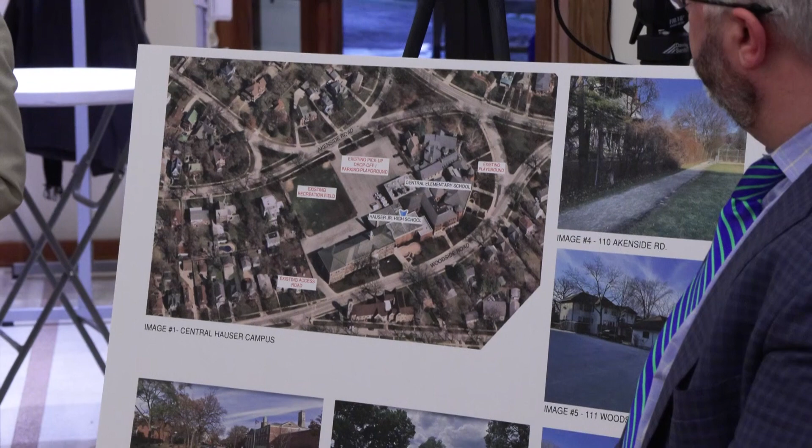We'll talk about the existing conditions here for a minute, and maybe Jason could point those out on the site plan. Currently, to the east side of both Central and Hauser, there's an asphalt parking area. That is where staff parking happens, at the most eastern side of it. In between that and the school is where essentially the playground is.

So all hardscape play happens there. Just to the north of that, you'll see a sort of grass area. It is not usable a lot of the year. It's got some drainage issues, needs some redevelopment. So that's been a conversation that the district has been having ongoing about what is the best approach to make that more usable. As we talk about pickup and drop off, it happens to the east, really in one lane.

You see the two curb cuts along Akenside. So you have essentially one lane of traffic that comes in and drops off kids and then exits to the south there. So that happens at the rear. The majority of pickup and drop off happens on the western side along Woodside.

So Woodside becomes a one-way street during school hours. There's no parking on the right side of the street from 8 to 8:30, and then again from 2:30 to 3:30. So that is in order to allow pickup and drop off to happen along that eastern side of Woodside.

What often happens is that stacking happens on each side of the road, and so drop off happens on the western side of the road, and so we end up having this pedestrian crossing across the street. So that's something we'll talk about a little bit later, but it is an existing condition that we've been studying.

As we talk about the recreation fields, I've already mentioned the grass field. Central has an existing playground at the front of the school. It's about 2,000 square feet. It's very undersized for the size school that it is.

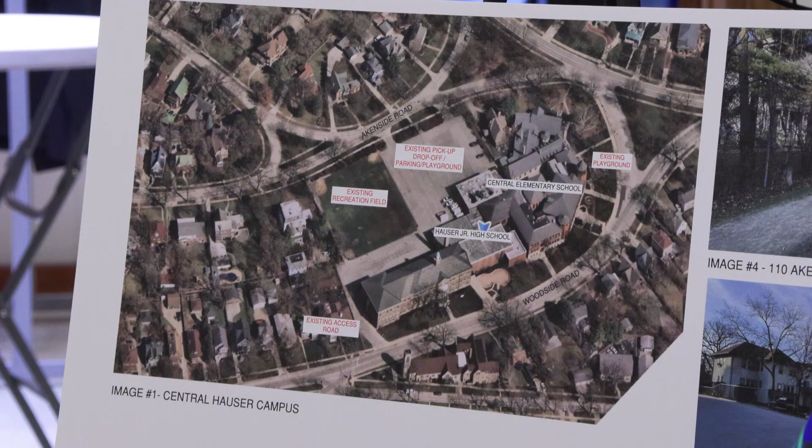As we move forward, our proposed plan looks to, again, separate that parking and play.

So what we're looking at here is the existing parking spaces at Central and Hauser are 77 spaces. We'd look to increase that to 86 spaces, including 4 ADA spots. We feel that right now that works well for the school, and it gives a little bit more parking. Required by code parking is 114 spaces.

So we are challenged with trying to provide all of these things, more recreation space, safer pedestrian routes, as well as meeting the code for parking. So I'll talk about that in a minute.

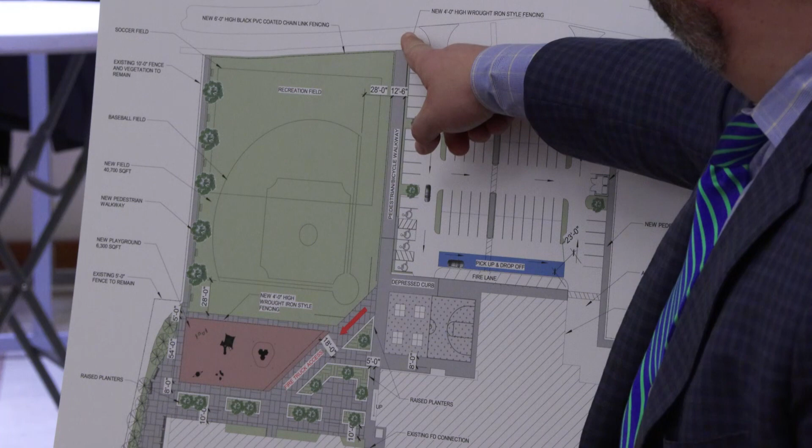We've identified 3 pedestrian and bicycle routes that come in from the east side of the site. The largest and widest one at Central is really what we're calling the pedestrian bicycle thoroughfare. So all the kids would come in there. There's a large population of kids that bicycle to school, so that's something that we wanted to accommodate for.

Oftentimes, many of you may have seen kids walking through parked cars or through traffic, and it's just not a safe condition. So we're looking to make that better and separate those 2 modes of transport.

As you'll see toward the left, we have a recreation field. We would propose to redevelop that. The district's still in conversations about what is the best way to do that in terms of approach and usability and cost. So that's something we'll be talking about later.

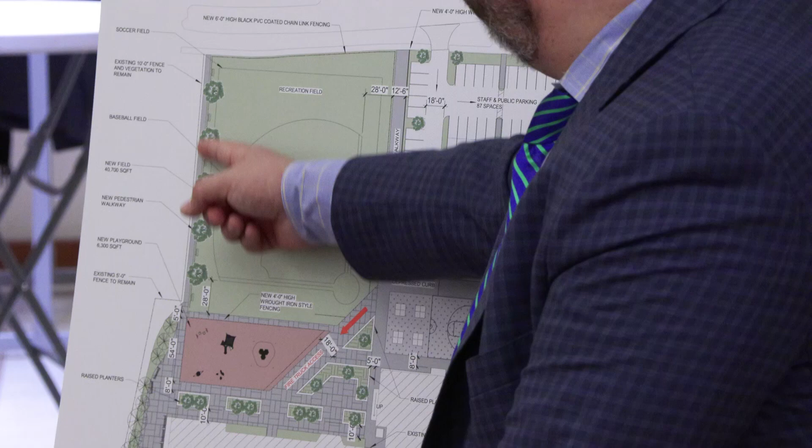And then just to the west of that, we have a new developed playground that would be primarily for Central, but would serve both.

Through a lot of conversations with the village, with the fire department, and then also with the village arborist, we've identified some key constraints for the site, primarily looking at the playground at the front of Central. It's got some large oak trees, 2 oaks and a maple that we do not want to destroy, and really to enlarge that footprint is not a doable thing.

So we moved that playground to the back of the school, and so that gives more space and obviously saves the trees. So what happens with the playground at the front of the school is still in conversation, but it looks like widening that or enlarging that is not going to be feasible.

As we talk about... I'm sorry, I lost my train of thought.

As we talk about the playground at the rear, that would be an engineered wood fiber playground, so it does offer some permeability. Jason will talk about those percentages here in a minute. But we will be looking at not only infiltration underneath the recreation field, but also the playground and then permeable pavers as is indicated on the plan.

There are a few things we wanted to bring about as we got into looking at this. So as we look at a few variations that we're going to need to be requesting, one is parking lot landscaping.

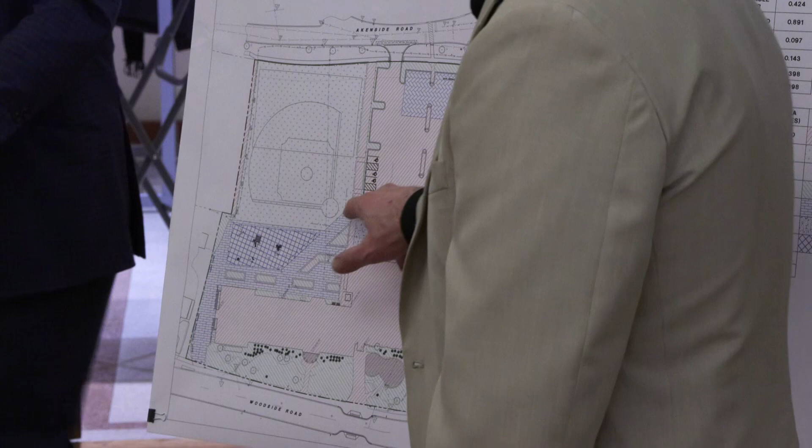Those pavers are in two locations: one in the parking lot, and the other in the walkways around the playground, including the access drive for fire access over to Woodside.

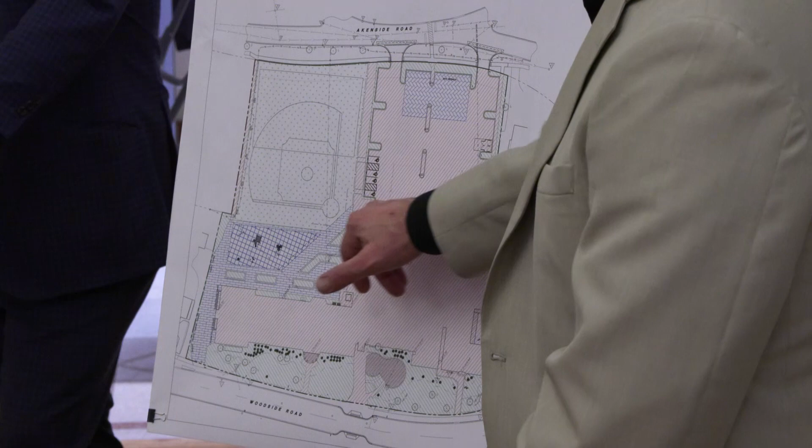The acreages are: wood chips, 0.14 acres; permeable pavers, including the walks and parking lot, 0.42 acres total; and the concrete basketball area, 0.1 acre. So the total is 0.66 acres. Considering the disturbed area for the project is 3 acres, we think 0.66 is a fair amount for that level of development.

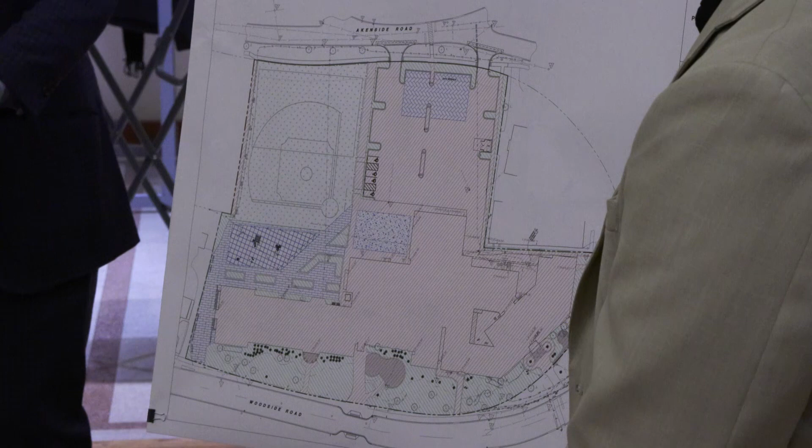One more thing I want to point out is that we propose a safety measure on Woodside—a curb extension, which involves bringing the curbs of the street in towards the middle of the road at the crosswalk. This was highly recommended by the traffic engineer.

The intent is that it shortens the distance pedestrians are in the roadway. It also minimizes the number of cars parked right where pedestrians are darting out between cars, since cars can't park in those areas. This frees up space so the pedestrian can be seen from a longer distance.

That's me. You want to go back? Yeah.

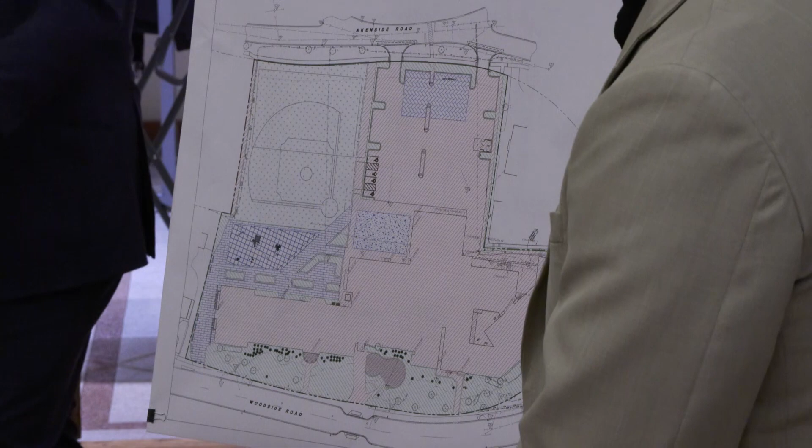I did want to mention, thank you—that crosswalk extension, we looked at that. As Jason already said, it does shorten the distance the pedestrian has to cross to get across Woodside, which I think is about a 37-foot wide street.

We're proposing a reduced flared curb extension of 7 feet, so it still leaves a usable two-way street while making pedestrians more visible as vehicles approach. That's a measure we feel is important at the entrance of Hauser. There is a crosswalk at the entrance of Central, so this would mimic that, but without the stoplight.

No stoplight is proposed. The other thing I wanted to mention was the fire access that Jason touched on. We met with Chief Buckley and discussed our proposed access around the site, including closing off the access drive north of Hauser, which is often used as a cut-through. When Woodside is one-way, it's hard to tell when it is or isn't, so left turns aren't allowed there during school hours.

Oftentimes that happens, so it's pretty hazardous. We're proposing to close that down, make that a pedestrian thoroughfare, but still provide access for fire trucks when necessary. Chief Buckley was good with our approaches, both at the access drive and the backside of Hauser. Access to Central is pretty straightforward with the alleyway back there. The primary fire connection is at the front side on Woodside of both schools, so that would be their primary location to set up.

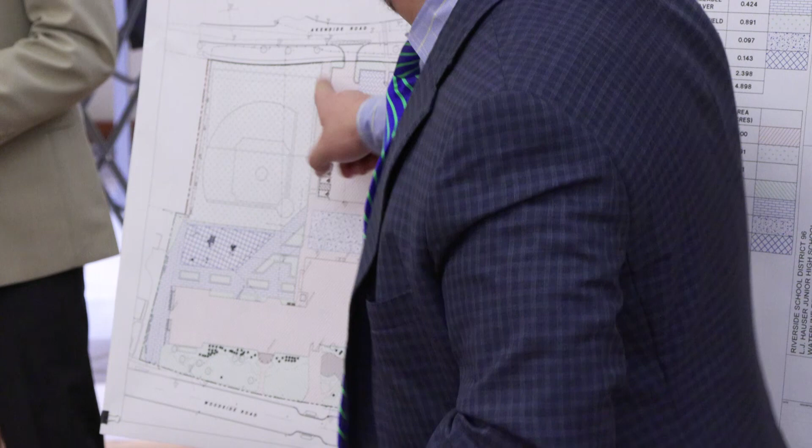Commissioner Miller: Just picking up on the fence issue, so there'd be a 6-foot fence around the entire field. Can you point out where the other 4-foot fences would be? Around the wood chip playground, right? And then also along the pedestrian walkway, separating the vehicular traffic from that pedestrian walkway. And that walkway is 12 feet wide? Yes. Okay, any other fences?

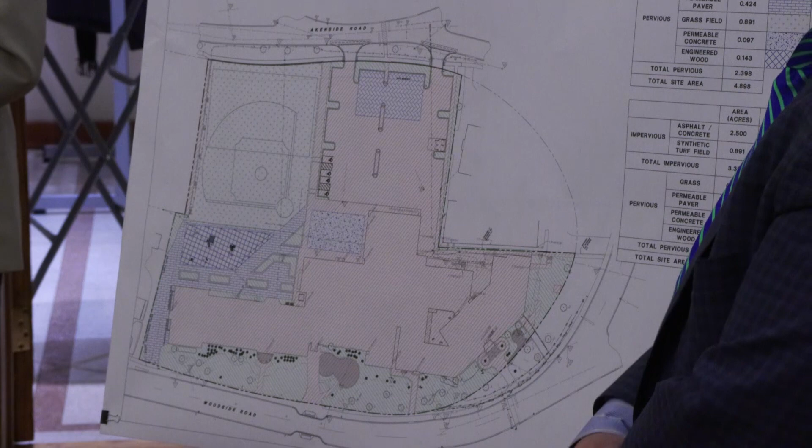There's the backstop at the baseball field, which is 20 feet tall. And that's it, the other fences are existing, to remain. So can you explain the rationale for having the 4-foot fences along the parking lot?

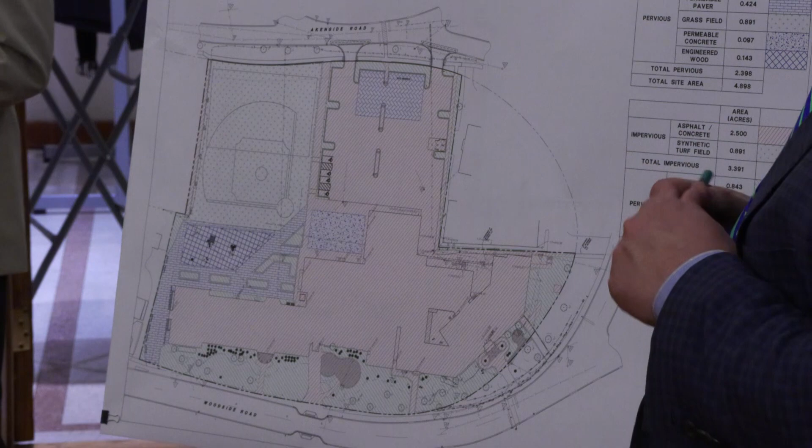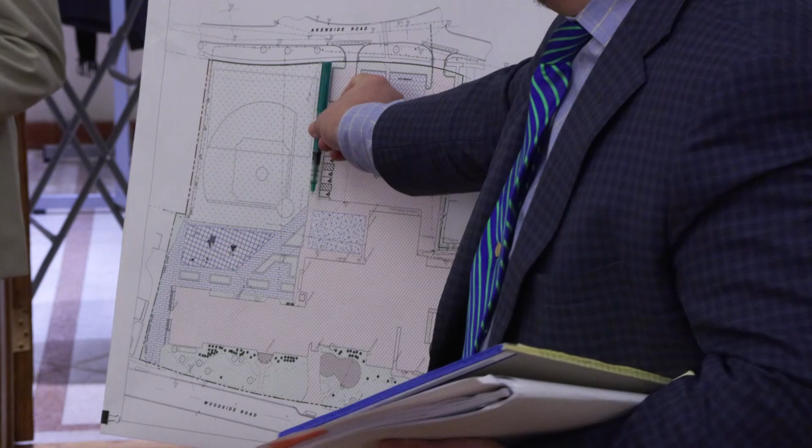Well, I'll assume there'll be bumper curbs there like any other parking lot. The 4-foot fence around the playground area is pretty standard practice, it's a safety measure. We've got elementary school kids, as young as preschool and first grade, so that's a standard supervision rule that we like to use, and the district used at other playgrounds. Along the walkway, it's important to separate that vehicular traffic from the pedestrian traffic. We're trying to define spaces, but they always seem to overlap when they're right next to each other, so to avoid any accidents, it's a good safety measure.

What we would provide—but now for the central walkway that goes right through the parking lot, you're not proposing fences to fence in people there? No, if I understand where you're going. But you're assuming that students are going to use that as well, I assume? They'll be allowed to use that? We're calling this the central—yeah, the one that goes through the middle of the parking lot.

No, we're not proposing that to be fenced. The intent there is that would be staff, adults. We're providing a sidewalk, but maybe folks that are paying a little bit better attention than kids going to school. So from a parent and someone who's lived not far from that school for like 15 years, I suggest that kids would use that walkway that goes right through the parking lot.

If for no other reason, there's a crosswalk right across Akenside. So kids coming from that section of the village, walking or pushing their bikes, aren't going to cross that crosswalk, then take a right and go to the 12-foot wide walkway. I'm just saying—I agree with you, and it happens today.

So what we tried to do is flank either side, north and south, and provide one central. What the district does now, and I think they'd continue to need to do, is have someone staffed out there to direct kids that they can't walk through the parking lot. I'm just suggesting that's not sure going to happen.

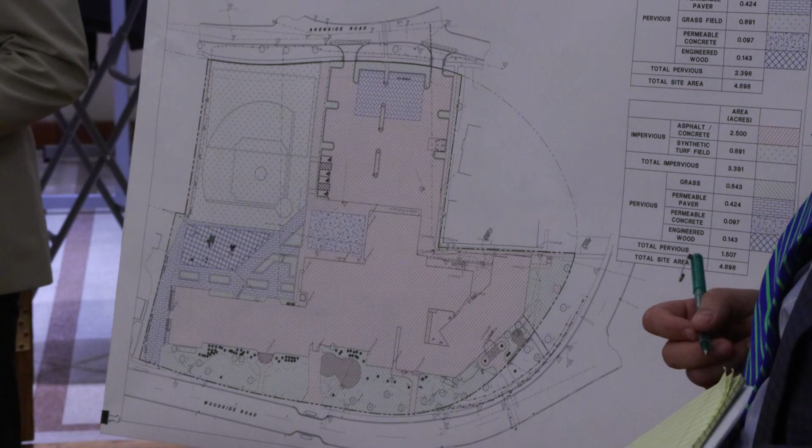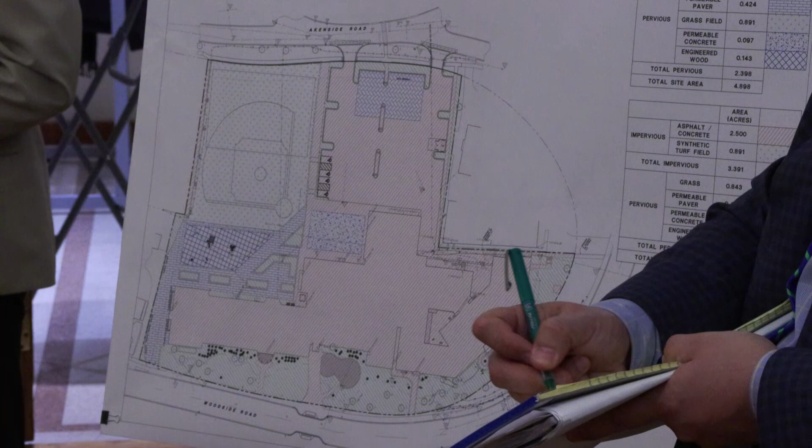I don't know if there's anyone from the D96 board other than Mr. Marhoul who will hear this, but as a parent of D96, the perception, I think, of the students is that there is very little fun at recess, and there's way too much supervision. I think this will make the play space far more controlled rather than enhance it—if the idea is that you bring a class and their recess will be in the fenced-in playground area. Since we have a role of approving this fence in this street yard, I think there are reasons beyond zoning for not having that fence. That's all I'll say about that.

Ryan, could I ask—were you planning to put a fence in the existing playground as well? No, we were not proposing that.

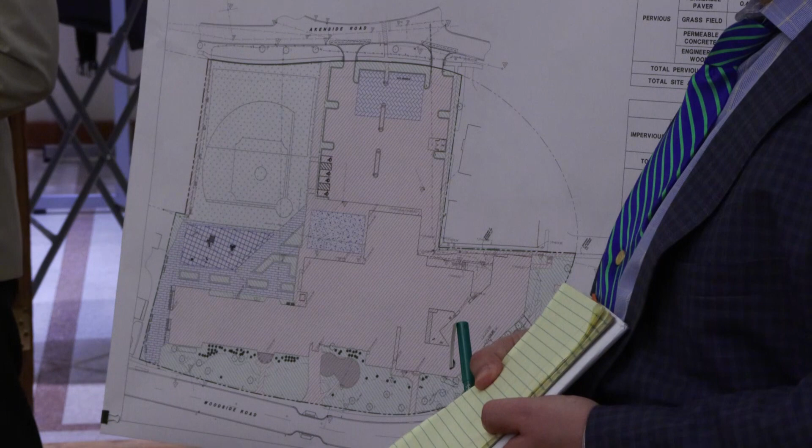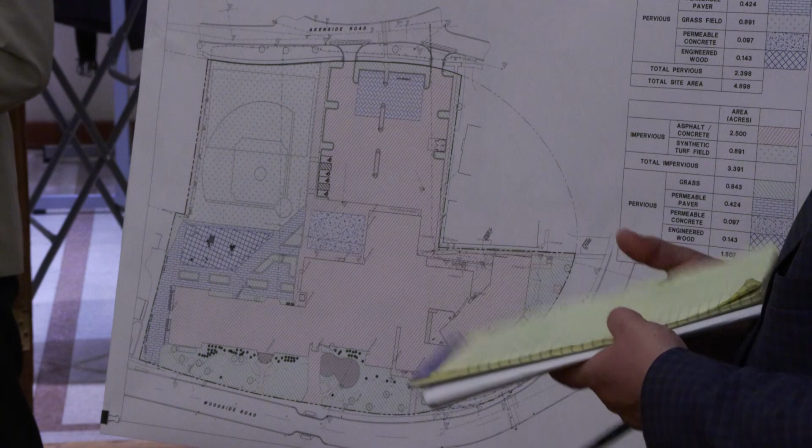Although, to Commissioner Miller's point, once the teachers are parked, parents or caretakers will be coming into the school from Akenside to drop off their children, right? Yeah, that's something I didn't highlight enough, but it is considered pickup and drop-off, primarily for Central Elementary, to alleviate the congestion that happens on Woodside. The intent is that staff would park early, and it could be used for pickup and drop-off. There's enough space to bring cars off Akenside for queuing, so those cars don't back up onto Akenside, which currently happens sometimes now.

Other questions, comments? I just have a point of clarification. I'm looking at what was provided to us online, and it appears that the playground and the basketball court are flip-flopped. Was that changed, or am I just reading your map wrong? The playground is still near Central, and the Foursquare and basketball court is still on the north side—can you point out the playground for me?

Okay, that's the new one—maybe I'm looking at the old one. We've looked at several iterations of this, and through conversations with the village and the arborist, that playground has moved quite a bit, so I apologize if that's not the most current. As I mentioned, there were reasons why it didn't work at the front of the school, so this is the most recent design. It was here at one time—okay, now it's there. All right.

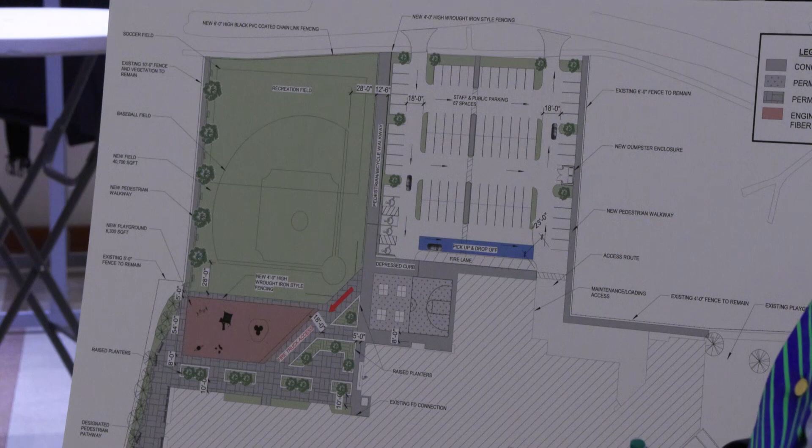With regard to the fencing, is there a fence along Akenside, right along the sidewalk? No, there's not. So the fields are not completely enclosed by fence? There's a large hedge, but that is not existing. We do have a fence proposed, though, behind the sidewalk on the side of the field.

And that was the 6-foot chain link? Mhm. And it's like a foot behind the sidewalk, is it? Roughly, close.

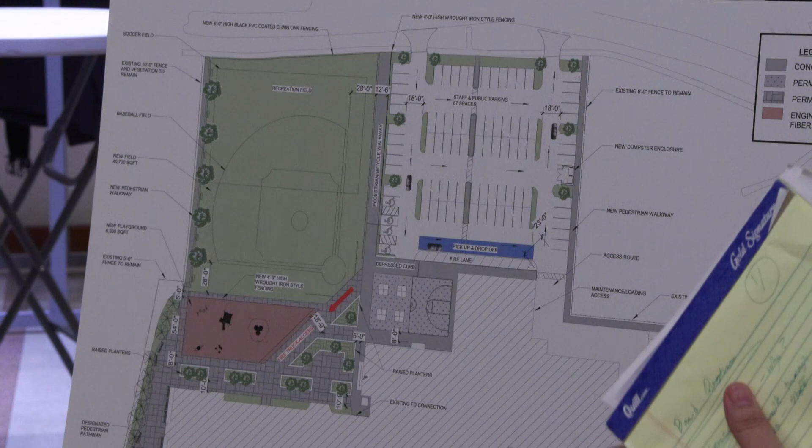Okay, and you're moving the sidewalk though, right? It looked like you were proposing a new sidewalk that moves it a little bit further away from the street. Not really, no. Maybe we had something in there that made it look that way. But really, the only sidewalk we're proposing to change along Akenside would be right where the driveways are, just the sidewalks adjacent to it.

Okay, I definitely would not be in favor of a 6-foot fence along the sidewalk there, certainly not chain link fence. Maybe something ornamental, like a metal ornamental fence and something shorter. But even that, we try to create a vista down the street and keep it off of the sidewalk. To be that close to the sidewalk is a little enclosing.

One thing I'd like to see with the next submission: I know we've already asked for existing impervious and proposed impervious and what the difference is. But with all of the permeable pavements and surfaces we're starting to see come in as a replacement for landscape, I'd like to see a comparison between existing green space versus proposed green space. By green space, I mean planted area, not wood chips, and definitely not permeable pavers. It's a way to distinguish between the permeable that is paved and the permeable that is not, where something is actually growing.

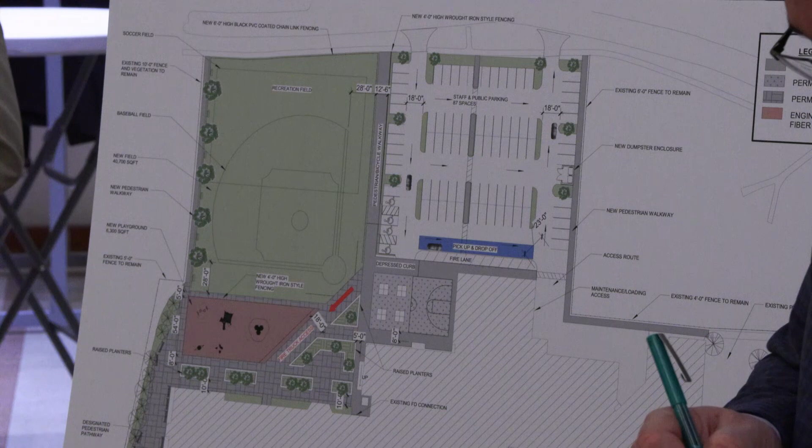I'm a little concerned about the additional crosswalk, just because there's already a mid-block crosswalk with a pedestrian signal, which is good and functional, but adding another one in a fairly short space there -- I think it'll be safe during school hours, but not as safe in the off hours when people aren't expecting pedestrians and children. There's a 20-mile-an-hour speed limit through there during the day, so people are super careful, but you're introducing another place where people are allowed to cross and cars are required to stop, though that doesn't mean they will because they might not see them. So I just think the increased safety with that crosswalk is questionable.

I love the idea of the extensions, and maybe that could be done at the PED signal to try and get everyone to cross there. That's basically where they cross now.

Has that been discussed? That was the reason for the flares -- it is a mid-block crossing. We did attach the traffic study, so she looked closely at that, and the distances per her recommendations do work. But it is a concern that we addressed by that flare.

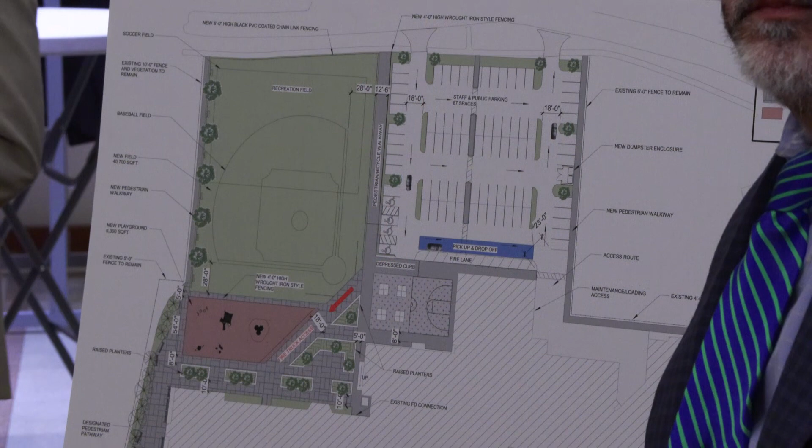So that's understood. Again, I love the idea of a flare, but I don't think another crosswalk introduced in that short space, especially without a traffic signal or a PED signal, is necessarily going to improve the safety. And the students seem to cross at that signal, so it doesn't seem to be a problem.

Commissioner Pelletier, could I add a few comments to that? I personally do not see the addition of that crosswalk as at all necessary -- not being a traffic engineer, but someone who's lived there, and my kids have gone there. I walk by there frequently during school drop off and pick up. I did that the other day to observe the conditions right now.

I think it should be carefully reassessed whether adding that crosswalk would be a positive or negative thing, and there's a lot of reasons. The only time that people cross that street, as mentioned here, is during pickup, only in the afternoon outside of Hauser. It's literally like a 5 to 10 minute long period.

If you put the crosswalk there, that encourages people to cross. There's an existing crosswalk 100, 200 feet over by Central, and another crosswalk at the intersection near Mr. Sachi's house. Adding a third crosswalk there, I think would add confusion. The traffic engineer should look into whether that's going to make congestion far worse.

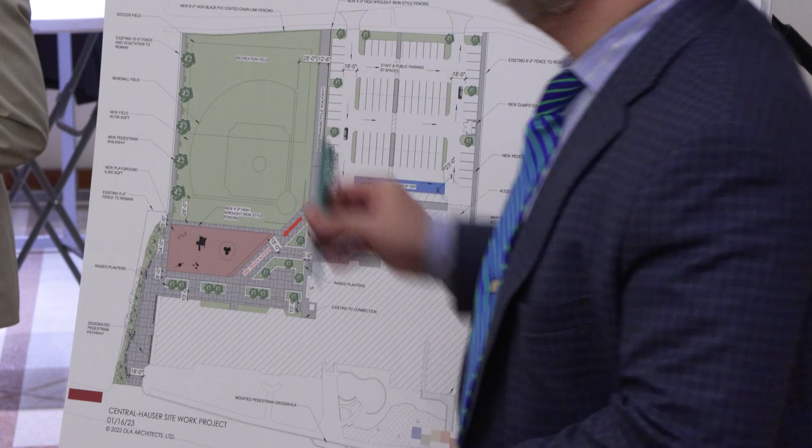With respect to Commissioner Miller's point about the other fence along the parking area, can you confirm, there's a sidewalk there, is that correct? And it's a different color, a different material than the parking area, right? So people would be able, even at a fairly young age, to discern that this is the sidewalk, this is the street, I stay out of the street, I walk on the sidewalk.

I'm reluctant to have a scenario where you're just whacking up fences left and right in a school. School's bad enough, you're there. When you're a little kid, you're there from 8 to 3. When you go out for recess and you've got fences all over the place, what Commissioner Miller said makes a lot of sense, that within the boundaries of safety, for the playground that makes more sense. But really the wrought iron sidewalk fence and the rear fence, I'd be reluctant to see that.

Commissioner Hennigan: I also would not like to see a 6-foot chain link fence along Akenside. I'm not opposed to the idea of a fence in general, but I would prefer something shorter, 4 foot, something more decorative. I think that would be more appropriate there.

Overall, I really like the separation of uses that you've achieved with this plan. I think it'll flow much better and be a safer environment. For that reason, I actually like the fence along the sidewalk, separating it from the parking lot. I know how kids walk around, the slower walkers, and to discourage kids from walking into a traffic lane, I think that would be a positive thing.

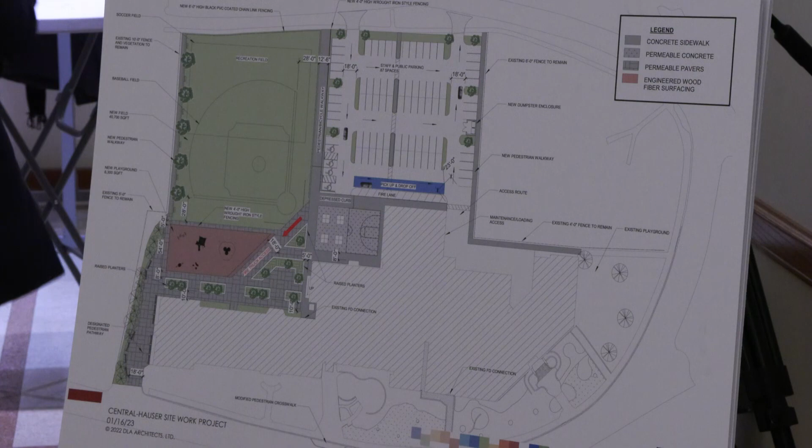So you talked about Woodside going 2 ways, not doing the one-way thing during school hours—has that been dismissed, or is that a village decision? Well, it was something that was investigated in the traffic study, but it's not something we're proposing with this site in this plan at this time.

Okay, and then the fields—what is the surface of the playing field? Is that determined? It has not been determined. We've had many discussions in the district and the community about what's going to be the most usable, what's affordable for the district, and what's appropriate for Riverside. So that's an ongoing discussion that we will have to get back to you on.

Okay, thank you. I had a few questions. Okay, there's just a few—I have to say I think your plan is very nice, I like it overall, I think it looks really great. There were just a few things that I had questions about or recommendations. That's why we're here.

Can you explain to me, just for clarity, that fire lane that comes at a diagonal behind—where would the fire truck come from before that? Right here, through this entrance drive. They would drive down to the end of the parking, and this is where we'd depress that curb. You'd have some bollards or something? Yep, bollards there, and this would be flush so the truck could just drive onto that, and we would size this area so it could handle a fire truck, and then you could drive down to there.

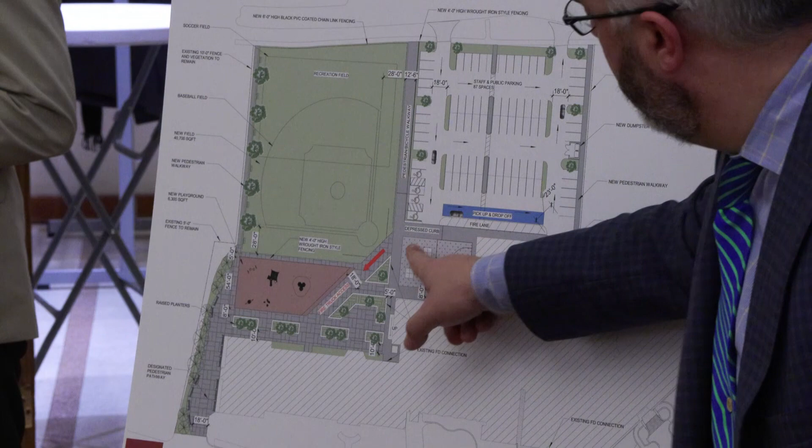I see where it says depressed curb, yeah. So is the idea that once it comes towards the school—and I believe there's an entry to the school right there—that it stops between the planters? Correct. And they don't need any more access or anything, the fire people? No, NFPA says they need to get within 150 feet of the building at all sides.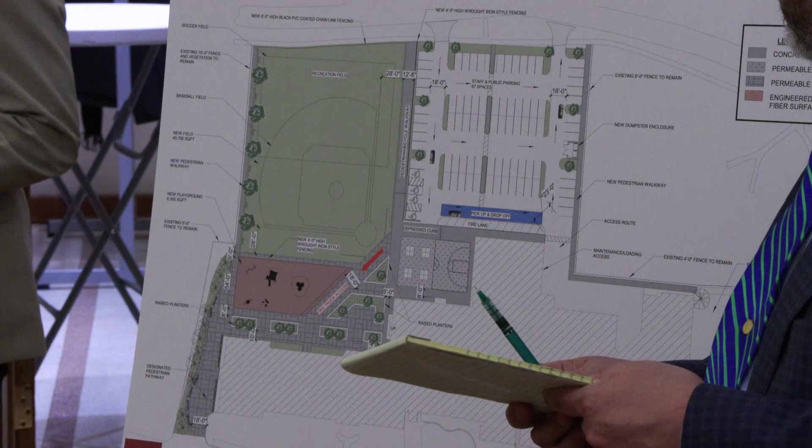It's up to the fire department to decide how many lanes of access they need. They're the authority with jurisdiction. We reviewed this with Chief Buckley. The primary Siamese water connection is at the front of the school on Woodside, so that would be their primary point of entry, but that gives them access all the way around the building.

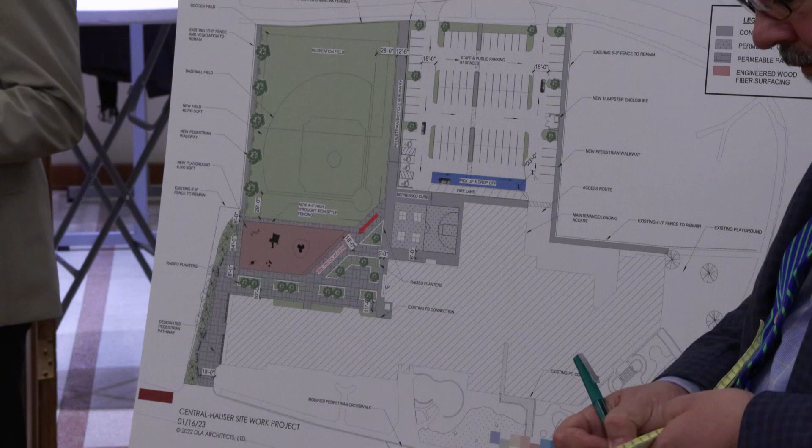What kind of planters are these going to be, how tall are they, and what's their purpose? The purpose is a combination of congregation, green space, and outdoor learning space. They're not 100% designed, but we're thinking of a low planting wall with some natural stone, giving kids somewhere to congregate and be behind the school before they enter, in a safe place. If a class wanted to come out and spend time outside, there's opportunity for that as well.

So they would be child-friendly, student-friendly? Yes, potentially for use of Central as well as Hauser students. In terms of height, 18 to 24 inches, somewhere in that vicinity. I'm not sure what's better for children, outdoor learning, or green space, rather having a flat surface or these planters and the maintenance involved. I don't know, but my daughter said kids aren't going to like planters, and she's in high school now - she went through Central and Hauser, but that was her impression.

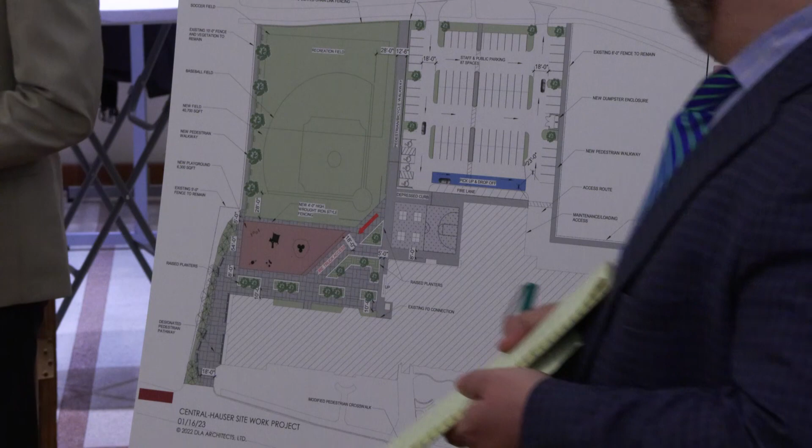Now the pavers throughout this area, the heavy-duty pavers so trucks can drive on them - could one of you talk about the different characteristics or appeal of different types of permeable surfaces? For instance, why not have this area be the permeable concrete you have elsewhere? Why make them pavers? What was the rationale, and what will this space be used for - just people walking, or kids playing too, and what's better?

Probably a combination of both. The intent is, obviously the pavers are a little more decorative. We wanted to create clear pedestrian paths where there are none today, so that's part of it. Beyond that, I think permeable pavers have a higher infiltration rate than permeable concrete, so that's something we thought was more appropriate. Obviously pavers don't work very well for a basketball court or four square, so that's why there's a difference in material there.

So they're more permeable than concrete or asphalt? That's interesting. Certainly more than asphalt. Yeah, but pavers don't give a good ball bounce - if you're playing basketball on pavers, you might hit the corner and it'll go weird. So the permeable concrete provides a better surface for that.

That's why I was thinking about this area, because I can conceive there's a lack of space - there always has been in this area. Kids would be playing here, and I don't know if they'd just be sitting around, bouncing a ball, or whatever, and whether having all those pavers would be most beneficial for kids playing. But I take your point about providing a pathway.

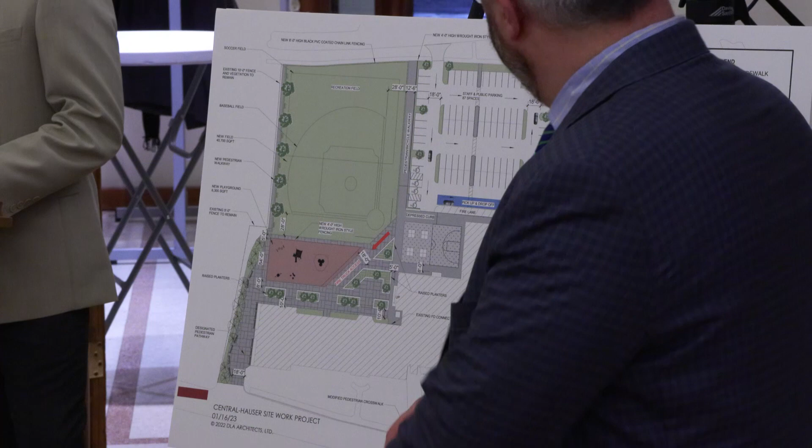One thing I didn't mention is the pedestrian pathway we need to provide. There's also an entrance adjacent to Hauser, and cafeteria delivery happens along there, so there are multiple points of pedestrian traffic and loading at that spot. I was going to ask about delivery trucks, not just fire trucks - where would they go? Delivery for the schools would happen along that drop-off lane, obviously not at drop-off time. That's the maintenance garage, so they'd receive deliveries there, and adjacent to the planters is the ramp into the kitchen - that's where they receive deliveries. The truck would park in the drop-off lane and walk down to that ramp.

I also had a question, or a recommendation. The walkway that runs the length on the south side - I question the necessity of that. It wasn't clear why that isn't just green space, because from my experience being there, I have a feeling very few staff, students, or anyone would use that as a walkway. Staff would only use it if they're one of those people who parked in one of those 13 cars. Students - I don't conceive where they'd come from that would use that pathway as opposed to one of the others.

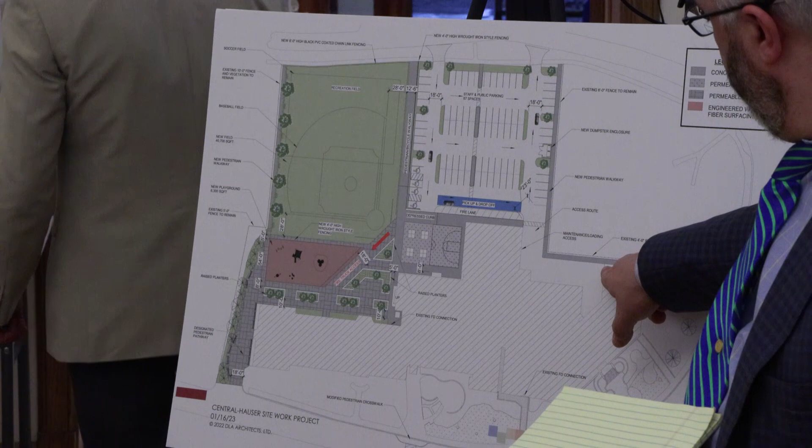So there's an entrance to Central Elementary School right here. That would be their primary access to the playground, now that it is at the rear.

The other thing we learned in meeting with both Central and Hauser is that they felt Central would utilize pickup and drop off in the rear on Aiken's side more than Hauser would. So we wanted to provide that clear, safe pedestrian path and crosswalk into Central.

But I'm discussing the one that goes from your crosshatched crosswalk area there, east, all the way east along the property line. Yes, that area. Well, it seems to me it would be more appropriate to have that as a green space and not a walkway.

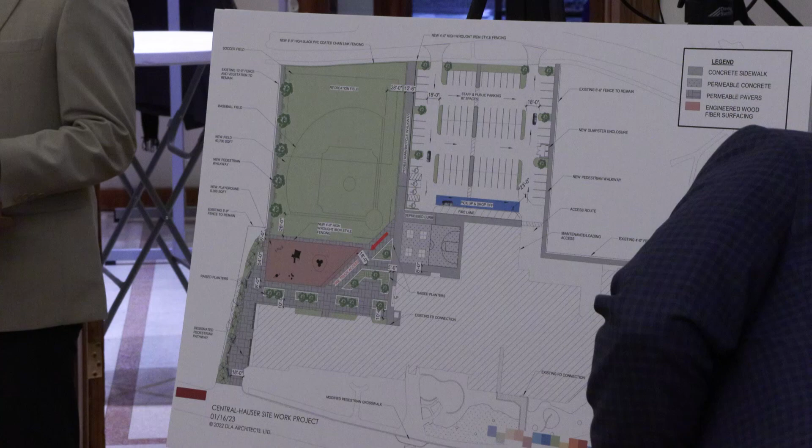Agreed, we talked about that. We thought about that. One thing we wanted to do, and I'll give you my rationale, because I know we aren't providing green space there, is that, back to your comment, kids will take whatever path they're closest to. We wanted to provide multiple paths into the site: one north, one south, and one central. So that was our rationale, trying to balance all of these things.

I would suggest rethinking that, because you could get more green space there. I don't conceive of, if you think where those kids would be coming from, they'd be crossing at the crosswalk over Aiken side. They're not going to be walking over to the one there. If there's green space there, they're not going to need it, they'll go through the middle of the parking lot. There's no population of kids coming from the south down that area to that walkway. I don't see where they'd be coming from. So I'd reconsider that.

So you were talking about the north, east-west one coming there? Yes, just up to where that cross-hatched area is, roughly. Could you also discuss the internal drive lanes for the parking lot, their width? There was some discussion of north-south versus east-west.

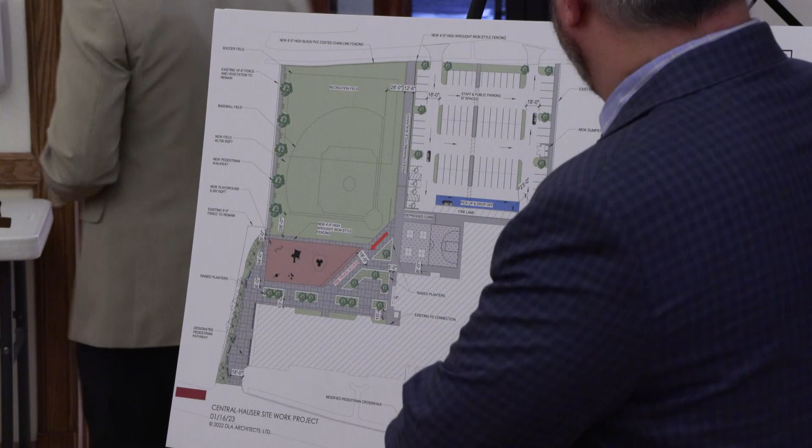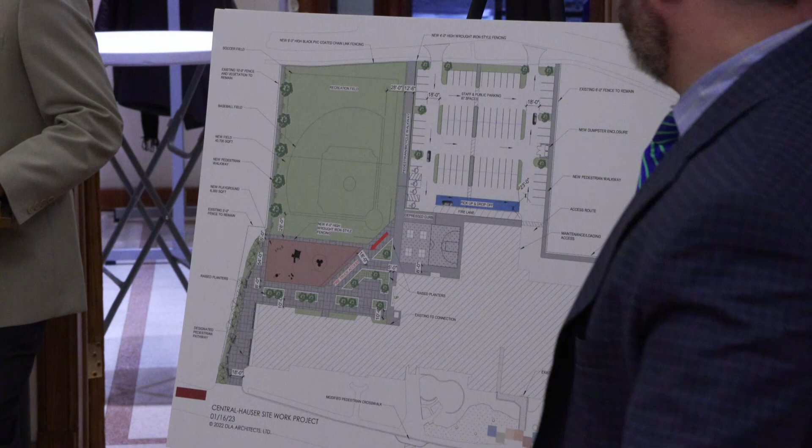The directions and their widths - those are one-way coming into the parking lot at 18 feet wide, where you have 90-degree parking back-to-back. Those are 20 or 24 feet wide drive lanes in the internal part of the parking lot, and then 18 feet continuing around, exiting the parking lot. So that's a single directional one, the circulating one. Yes. And you set those widths because that's what our code requires? I did.

I already made my comment that I'd look more favorably on having the main pedestrian walkway be a little narrower than 12 feet, because conceiving of how it's used, 12 feet seems very wide for that kind of sidewalk, with nothing obstructing it - no planters, no dogs, no fire hydrants, it's a straight shot. So 12 feet seems a little wide to me, and you could get a little more green space, a little more permeable space.

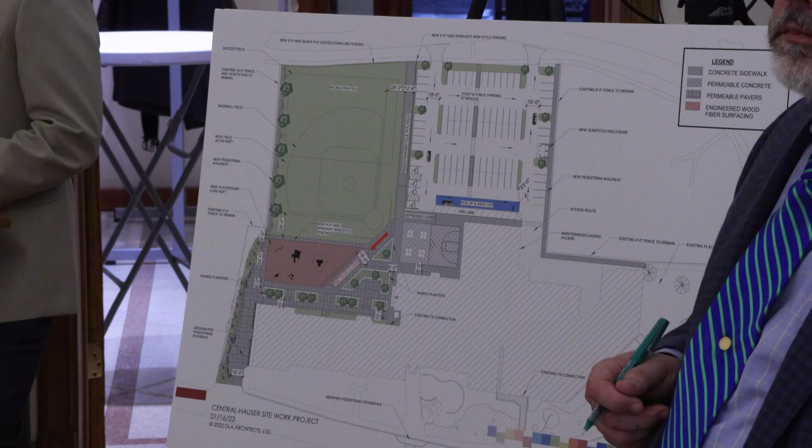We played with that as well. Our thought was, maybe it comes in the form of striping, but to provide a wide enough space to allow bikes to be walked down that path. Right, but just thinking about it, the bikes will be going one way, so it's not like a city sidewalk. When kids are coming in, they'll be walking or have bikes going one way, and when leaving, going the other way. So I don't know that 12 feet is necessary. But, was there anything else I had?

Oh, and I just wanted to say about the number of parking spaces. With our new TOD proposal for new zoning parking spaces, my calculation was that all our code would require of the district is 91 parking spaces. So at 86, I think you're obviously quite close to that.

Could I ask how you get a number like a 20% reduction if it's something like a school in a transit-oriented location, which this school would be because it's close to the train station? 20% reduction, so from 114, 20% of that, you can get down to 91. That's how I calculate it, if our village board approves.

Is that an ordinance they're considering right now? It's under consideration. But they would still need a variation, down to the 86. I would actually be in favor of even a little less parking if that were possible, and maybe larger islands or other ideas, but that's my opinion.

More questions, comments? I'm going to go through my questions. Well, actually, go ahead, because I have a lot of questions. Please go to the podium, Mr. Sachi. Can you go to the podium, please? You should remember that.

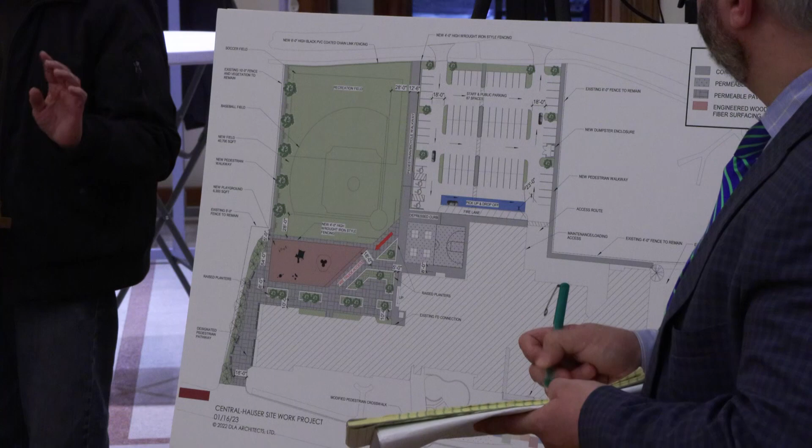So I'm Lonnie Sachi, 111 Woodside Road. I'm a bit concerned about an existing chain link fence between my driveway that needs replacing. Sections of it have been replaced. You're doing a black PVC coated steel fence in other areas of your plan, but I didn't see anything being done there when I was looking at the schematics. Is that fence going to remain as is, or are you going to replace it with a black one to coordinate?

Exactly, I'll show you the board. It's in this location here, and it's 10 or 12 feet high at the back of my driveway, tapering down right about where the school ends and my building ends, pretty much even, and then it dips down to, I believe, 6 or 8 feet, I think it's 6 feet. But that's just exposed steel chain link fence, not coated. So you're proposing black all over, but that one would remain exposed steel.

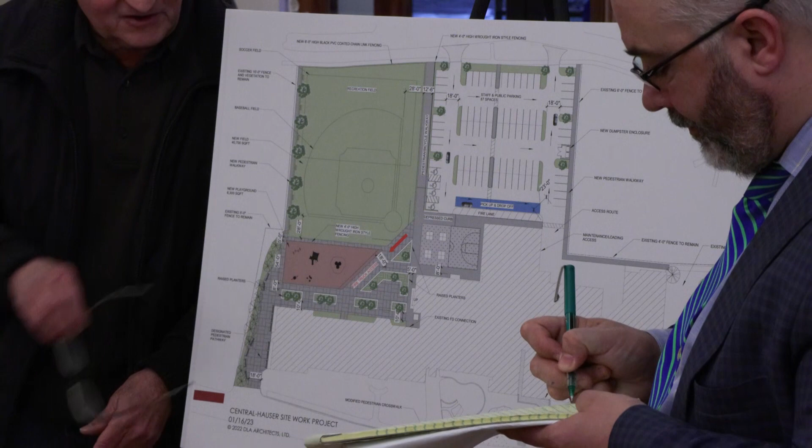I've talked to Jim Fitton about that fence needing periodic work, which I usually call their attention to when it needs it, because the bottom of it has sharp cross-sections of the chain. In a lot of cases they're protruding into my driveway, and they have to have someone come fix that all the time. So while you're doing all that other fence work, if it gets done, perhaps that should be part of it. Would that be considered a side yard at that point?

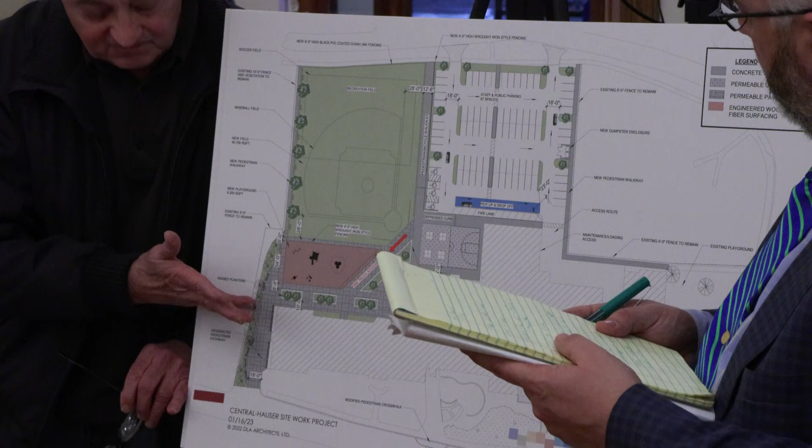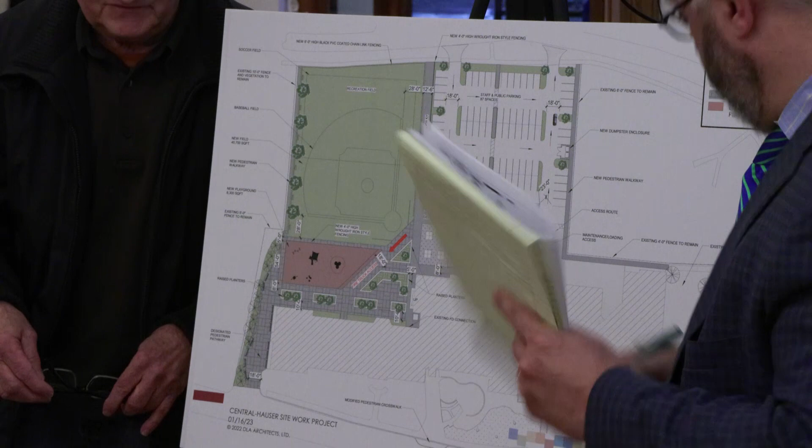Probably not, right? Well, to me it's a side yard. To them, it's an entry point. I'm just trying to find out if there would be a challenge to having that tall of a fence proposed. From the village standpoint, it already dips down for the majority. Like I said, where the school building ends, and about even with where the back of my building ends, it dips down considerably. I'm okay with the height, it doesn't bother me at all. It doesn't bother any of us who live there. So that's just a step point. The configuration of it is fine as is, I think, but that's up to you all to decide.

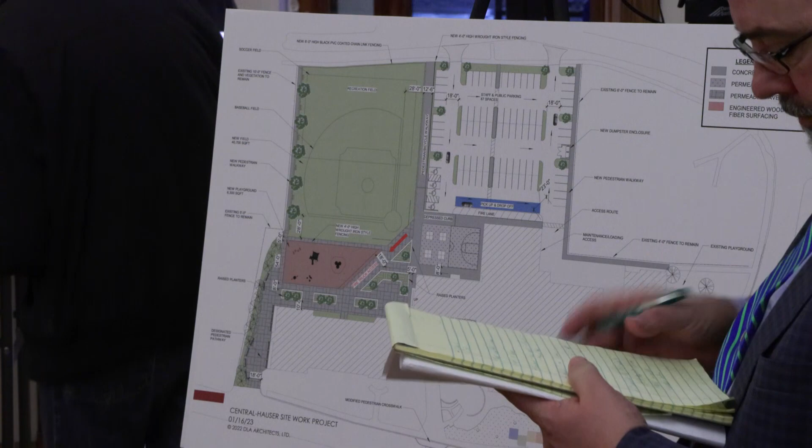Okay, and I might also add that I like most of the plan, but, on the school side of that existing chain link fence, there is no greenery at all. It's just pavement, my blacktop ends at the fence, and so does the school's. But I know on some of the conceptualized drawings I've seen there are provisions for some green space.

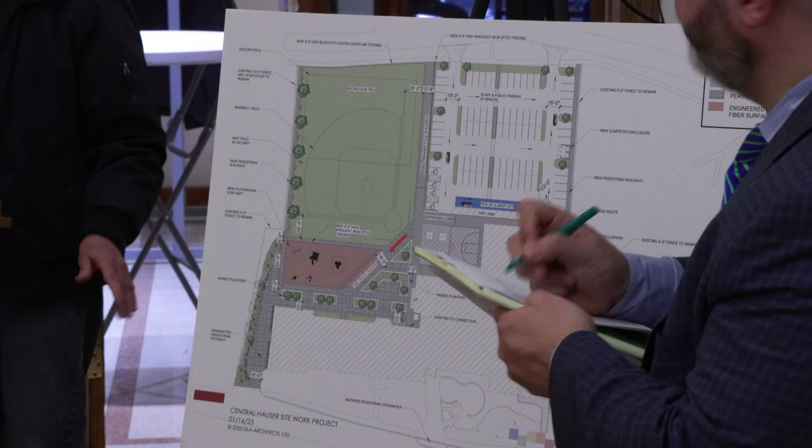I would just want to make sure that whatever you propose there isn't the type of thing that's going to be growing through the fence and protruding into my driveway, because we don't want our cars all scratched up with branches. So something like a 2 or 3 foot hedge along there, if you're going to do green space alongside, would be preferable. Okay? Thank you.

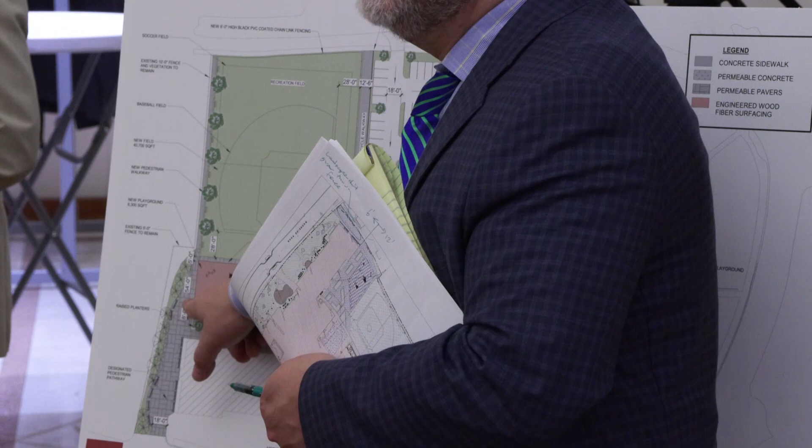Mr. Kelly, in the beginning you talked about, because there aren't going to be the required number of parking lot landscaping islands, that there was going to be additional perimeter landscaping. Can you point out where that is? Sure, just looked at along here, where it does not exist today, we provide some additional perimeter. But not directly around the parking lot? Yeah, no, not directly around the parking lot. Okay.

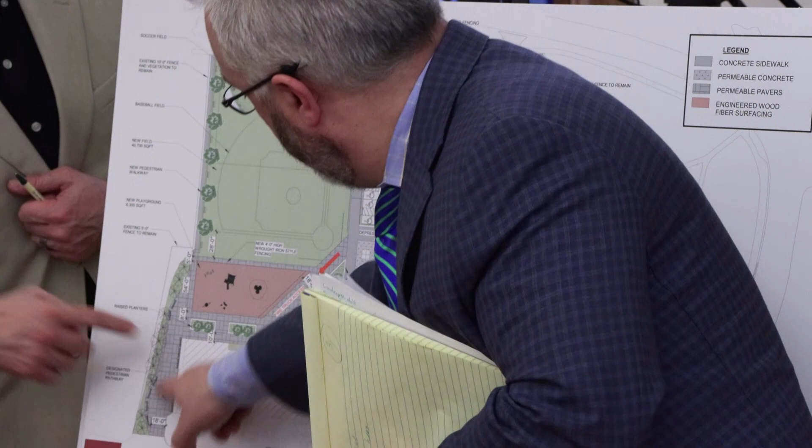Where's bike parking going to be? Also along this north side. Well, so just assure us that you've already figured out the racks and where they're going to be placed, and when a fire truck does have to come down through there, that's all worked out? Yeah. Okay.

Planner Siren, in your experience, is it a thing to merge parking lot islands so that you have the same square footage but fewer of them, so you can plant something that's going to survive in it? It's advisable if you want to plant a shade tree. I think that makes sense, so you don't have narrow medians. Is that something you and the board have discussed? We have discussed, I mean, I don't think we've discussed it here. Those small islands make it very hard for a shade tree to survive. We do them and we replace them, and it's a challenge, so it's something we're always battling.

So you discussed it with the D96 board, or no? Oh no, I'm sorry, not with the school board in terms of combining perimeter islands into a larger island? I'm sorry, what's the question? For example, we have not discussed that strategy. We're really, in this initial concept, looking at how do we comply with all of the ordinances, which we don't, and kind of get some feedback. Would that change? They still need a variation because they don't have as many, but is that something they could consider? Certainly, so it would be based on square footage rather than numbers? Sure.

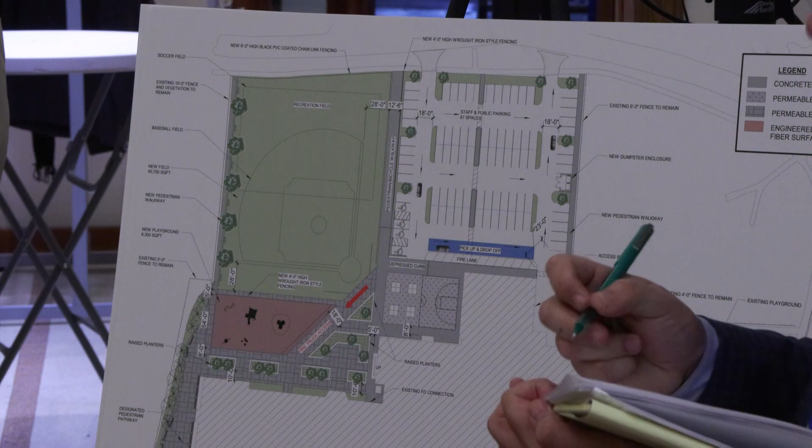I think a lot of the ones right up against the fence are buckthorn, but I'm just wondering about that. This is also something of an artifact of living with something for a long time. Having that crushed limestone is a softer look, maybe more appealing, more child-friendly, than a long concrete path that might crack in the future, get damaged, and start looking not so nice. So just aesthetically, I would comment on that. I don't think it makes any difference to permeability.

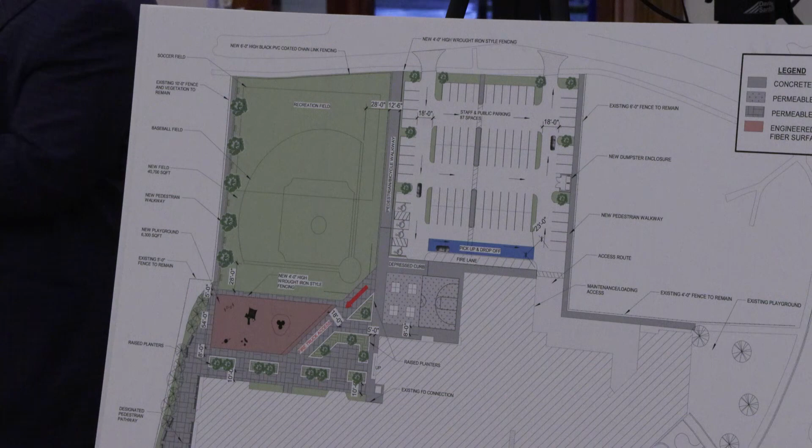This field, is this larger than what exists there now?

It's just a bit larger than, just a smidge, yeah. Just a tiny bit, okay.

I had a question - you said it would be an 80 to 90% reduction in stormwater peak flow into the village sewers? Right now, water lands on the surface and runs off quickly into the street. It doesn't even go into a storm sewer, it sheet drains straight to the street.

We're proposing to hold it for roughly 2 days, up to 2 days. It would hold the water and slowly release it, so you're getting that water released back into the system over 2 days instead of 20 minutes. So how does that slow release work with this vault?

I don't think you mentioned how large the vault is, and then I think you said it would filter into the gravel beds underneath. How does that work? So I don't have the size of the vaults yet, I'll be sure to mention that at the next meeting, and I'll be proud to brag how big it'll be. But it's sized for the 100-year storm, so that's a pretty significant event. It'll be a very large vault.

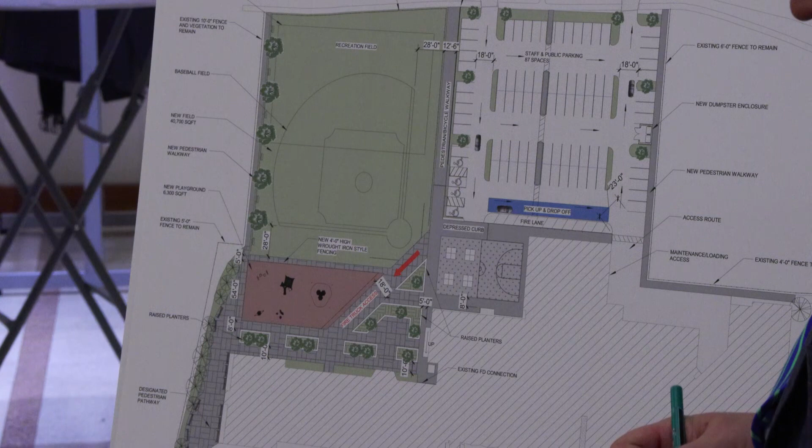Would you mind speaking to the site lighting and changes that might be proposed? Yeah, we're early on with that - in our next submission we'll include site photometrics. We will be including site lighting in the parking lot, for sure, a combination of that and some building lighting and some lighting around the new playground. But we would maintain the zero lot line lighting and dark sky principles. So that'll be part of our next package.

And to be clear, this doesn't affect the special use - nothing's being expanded, so they don't need to renew the special use, right?

That's correct. Commissioner Miller suggested narrowing the middle pedestrian walkway - was it just the one? Yeah, just the one that's 12 foot 6 inches. Are there other commissioners that agree with that, that really wanted it considered, substituting some green space? I actually like the wider walkway in that area - I think it allows for easier flow since kids are going to go back and forth.

Yeah, I agree. That's the walkway that would link up with the crosswalk, correct? Oh, I think you're thinking the crosswalk—the crosswalk's over there. So it would actually be this one. This is the one that... Oh, okay. Yeah, then scratch it, I don't really.

But that's the walkway that you're going to encourage the kids to use. Yes, we're seeing it as the main thoroughfare for bikes and pedestrians. Right.

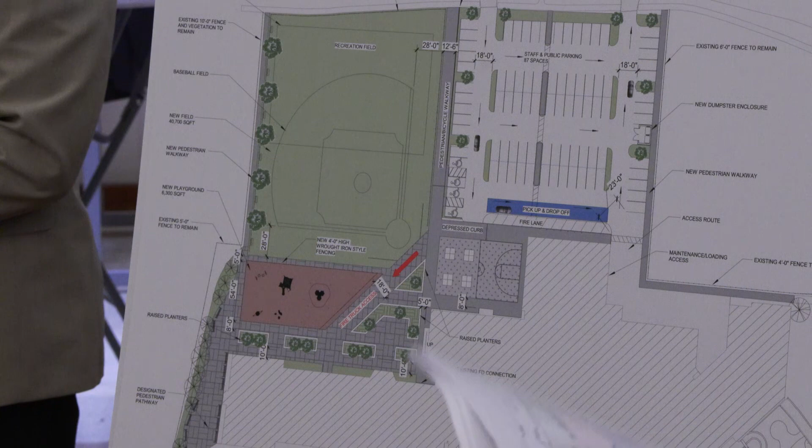My understanding, Planner Siren, is that if this was in the B1 or B2 district, that would have to be a buffer yard, an interior buffer—is that right? That's correct. Okay, but since it's in the R1, it doesn't have to be a green buffer. I believe that's correct, but I'll need to double check that.

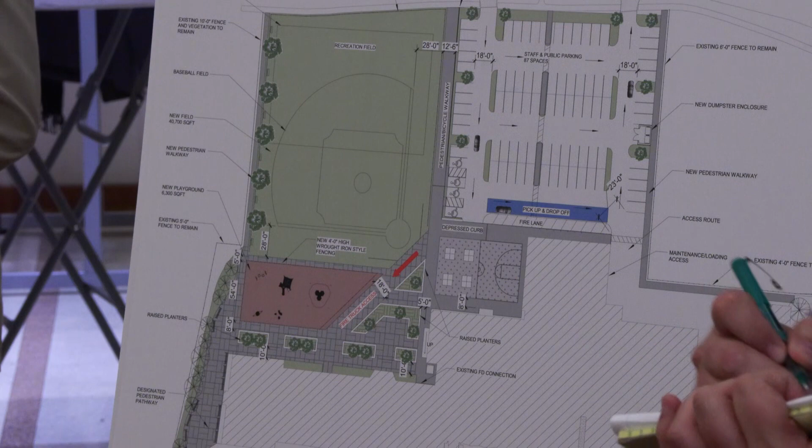I don't feel strongly, what you said about being agnostic about it all. But the reality is kids are going to, if you make it a green space, kids are going to walk in the green space, and it will be a muddy space and not so green before too long. So I don't have any real issues with having it as a walkway for people going that direction.

Well, if you put plant material there, they're not going to walk through there—I just don't think they're going to be interested. And it's far away from the recreational area, and I think our supervising teachers would not allow kids to sneak all the way over there and play there. Now, it's possible if they're running to school, one or two could run through there, but I just think it would be nicer to have that as green space and also further the permeable surface.

It's not an existing walkway, is it? No, it is not, it's just paved. Right, if it was paved up to the existing, I think kids would be more inclined, because you're kind of used to continuing that, but it does seem kind of unnecessary, I guess.

My concern if we get rid of that is what the ultimate intention is—you said there was an opening or an entrance for Central in that corner. Correct. I'd be curious if Central School would be using that, maybe as a primary grades or kindergarten entrance or something like that. I'd be curious, and if that's the case, then maybe we would want that walkway because there would be kids using it to get to that entrance.

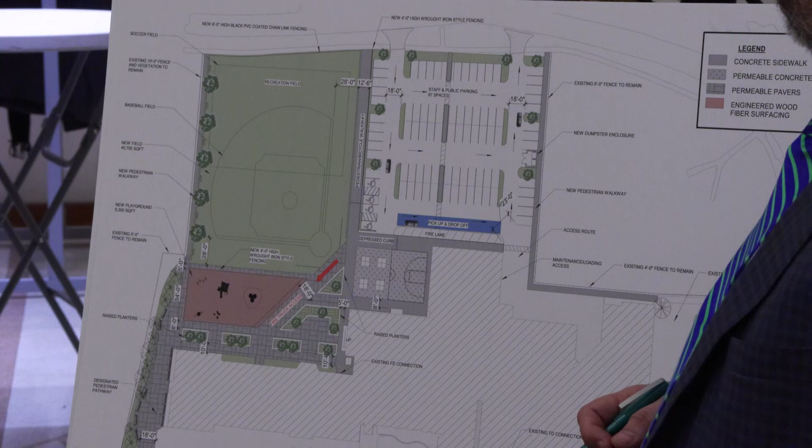In talking with the district and the principal, that is an entrance that's used to go out to the now asphalt playground, so it would be the thoroughfare for them to go to the new playground. I can't speak to the sidewalk running to the east because it doesn't exist today, but the thought is that would become more of a main thoroughfare into Central, both to the playground, pick up and drop off, as well as into the site potentially.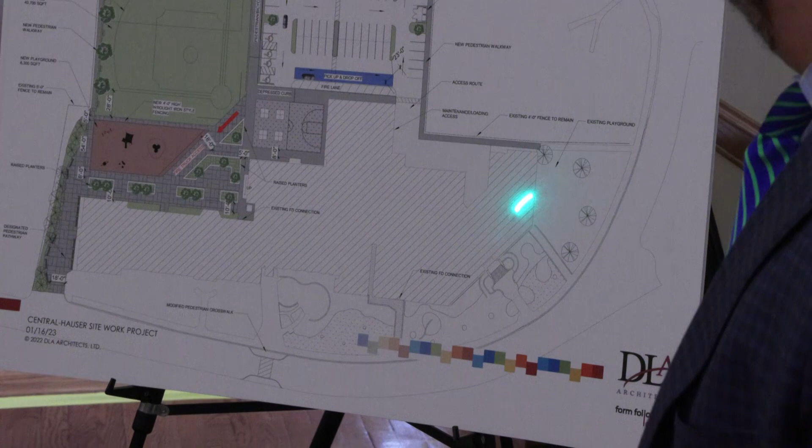Right now, this whole area here is all pavement. Kids go in and out, and at Central there's an entrance here, a door that kids go in and out in the morning. So I'm proposing that this is not at all necessary, because kids are going to go here, here, and then along this pathway over to the play area.

If you think about where people are coming from as they're walking down here, there's nowhere to come from, because this is St. Peter and Paul Church there. And then if people are over here, they're going to walk towards the school here. There's a driveway here, on the other side, by the church. I'm saying, where are people going to come to use this path?

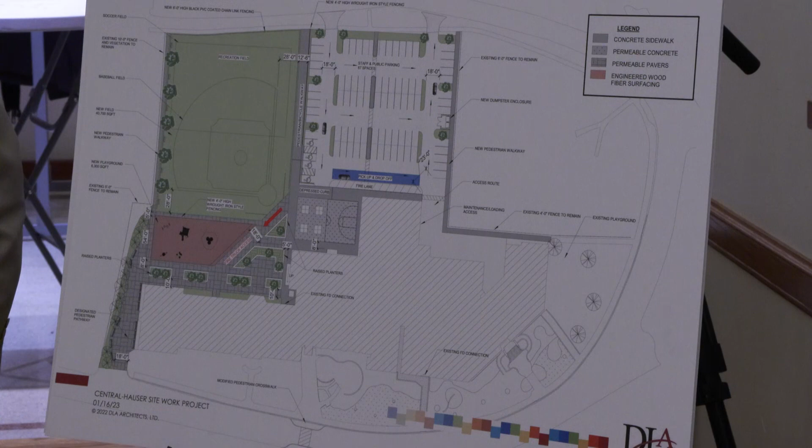If they're coming over here, they're going to come straight down this crosswalk and then down here. At Central, they're going to walk over here and over here. But if you have grades entering into that location, and families that live across Akenside, they would use that pathway to get to that entry at Central. But there are no families over Akenside here—there's a few houses, and there's a crosswalk across the street, they're going to come down here.

Another thing, as far as safety goes, is if you have little kids and there are cars parked here, your whole reason for having a fence here was to keep kids away. I don't think you'd want kids walking on that pathway if there were cars there, if that was the rationale for having a 4-foot fence along the other walkway. Right now, there is no proposed fence over there.

And the neighbor might prefer their green space rather than cement—something to consider, perhaps.

I think I summarized everything. Planner Siren, what have I missed? I was just unclear if there's consensus about the fence around the playground with the commission. I know that some were opposed and some were agnostic—I don't know if there's a consensus.

The fence around the play area, the wood chip area—it's all pink wood chips, 4 feet tall. Actually, is that really a side yard? Are they restricted on the fencing in that area, because it's kind of tucked into the building?

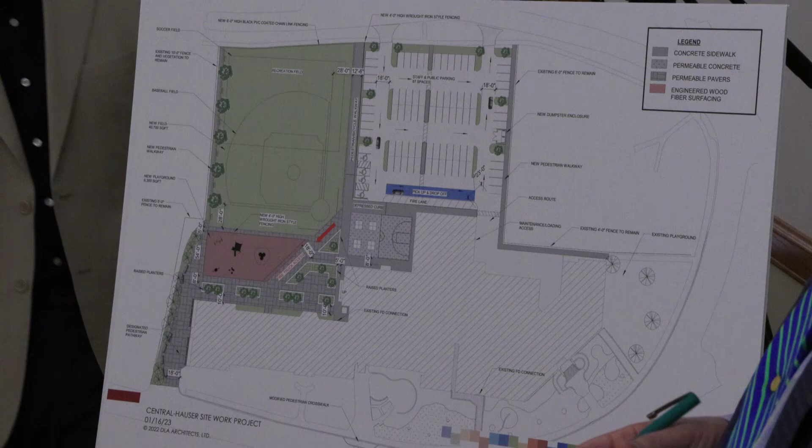Taking a look at this, I think they'd be fine with a 4-foot tall fence in that area, because it's the back of the building—40 feet would allow a 4-foot tall fence. So they could have a fence in that area by right, without measuring it exactly. I just wanted to clarify that—it didn't seem like it needed a variance.

I don't think that would. I think they were putting one on the existing one, which they had talked about before. Got it. I'm agnostic with regard to that fence. What about the rest of you?

I can understand the purpose behind fencing in a playground—I think it's a safety issue. So I guess I'm leaning more towards a fence as opposed to no fence.

Well, if we have no role, then I guess my opinion doesn't matter. But I think it looks to me like an extremely safe area, and you don't need yet another fence. I think Commissioner Matthews may or may not have been suggesting this idea when he talked about the walkway. You don't want to overprotect kids necessarily and tell them this is the only place you can be. But that's more of a pedagogical child-raising perspective, not a zoning perspective.

That's a good point, because this is not like the scenario at the playground in Ames, which is right off a street. This is a playground tucked behind the school. Granted, there is parking there, but safety's paramount, I get that, and if that's what it is, it's what it is. But if we could explore not having a fence around a playground, I think that would be a good thing.

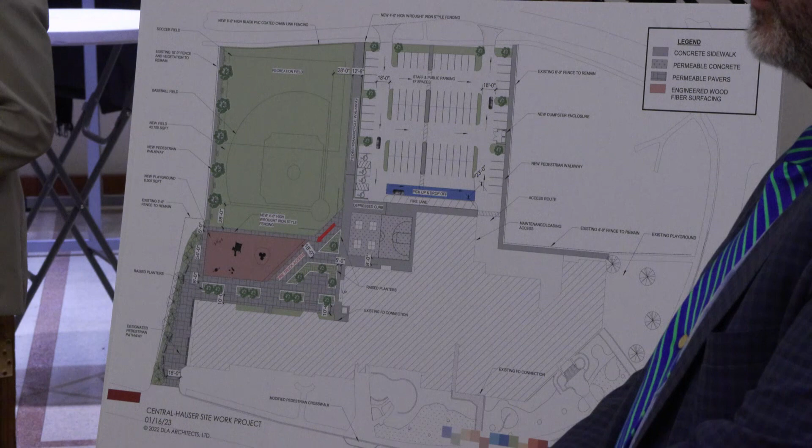Given where this is located internal to the site, I would strongly defer to whatever the school board would feel appropriate. I would not want to make this call on child safety for them. I would also defer to experts in school design and safety.

Great. Thank you. Can I bring up one more thing? Sure. With regard to green space, are we, as a commission, willing to entertain the possibility of fewer parking spaces for more green space?

I feel like the school should have a good handle on what their need is, so they should be providing what's needed as opposed to the letter of the zoning ordinance. I would agree with that, that if the school doesn't want all of the additional parking, I'd rather see green space. I'm in favor of more green space.

I actually had a question for DLA as to whether, when you were tasked with designing this, were you given a priority, like we want you to favor parking, we want you to favor green space, we want X number of parking spaces or more? How did you come up with this particular number of parking spaces?

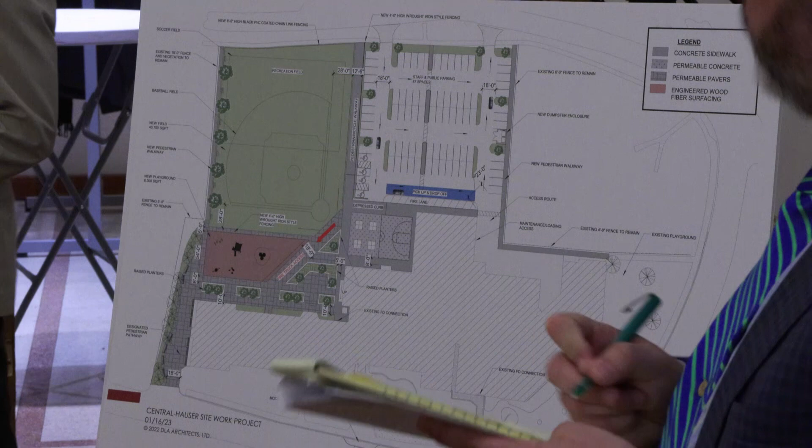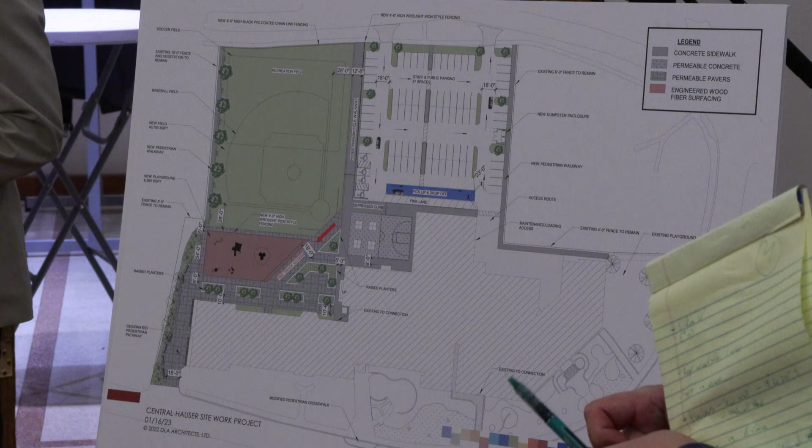We were looking to match the existing and provide more. We knew it was a very difficult puzzle. We knew we were going to be below what was required by ordinance. So we were trying to state a case that existing works today. We know the neighborhood has street parking, so we're trying to improve that existing condition and then provide some of the other amenities. Our priority is student safety, recreation space, green space. Parking's a necessary thing. Pick up and drop off is part of that safety configuration too. So again, a lot of moving parts.

I think there's certainly many ways you could, if the district wanted to, add more green space. And I, as a commissioner, would be in favor of even a reduced number of spaces, even further below what our code currently requires, for more green space.

Commissioner Matthews? Just one point to that. I'm almost in 100% agreement, except my concern would be this is a question for the school board and the architects and engineers who have the numbers. I'd be loath to push cars onto residential streets at the expense of saying we want more green space in the school parking lot, but in order to get that green space, we're going to have people parked on Akenside and on Woodside. The front of the school is Woodside, and there are cars parked on Woodside almost all the way down to 31st Street every morning.

Maybe not quite, I'm exaggerating a bit, but pretty far. So I think we need to be aware that this is the main parking lot, and we don't want to inconvenience the community, the neighborhood with cars on the street. I mean, improve the existing situation, because it's been this way forever, where there has been parking.

Commissioner Hennigan? Since we are talking about increasing green space in the parking lot, I think it would be worth reexamining the benefit of that sidewalk through the middle of the parking lot. I can see why it was included, but I'm not sure if that's the best use of that space, considering there are alternatives, and we do want to direct kids to use the large pedestrian walkway. Why encourage them to walk through the parking lot when we don't have to? And also, that could be an easy way to grab some additional square footage to make those islands bigger.

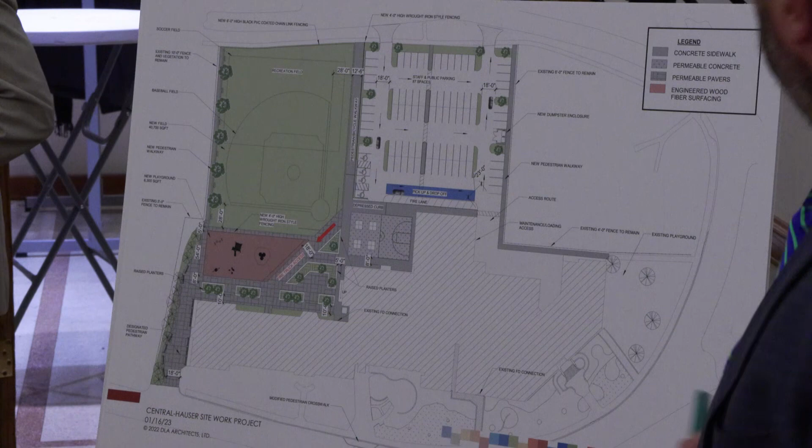I actually kind of like that thought. If we don't have to have that center walkway—and there may be a reason for it, I don't know—but if we don't have to have that, then the kids will have to walk in the pedestrian walkway. The thinking there, in talking with the district and the school, is that there is currently supervision back there to direct students, more necessary now than it would be in a large parking lot. It's not extremely large, but large enough that if you park in the middle of that parking lot, you're walking through it to get to either a pathway or the school. So offering some immediate, direct, safe pathway is a good design principle, something we do when we can. Again, lots of challenges on this site.

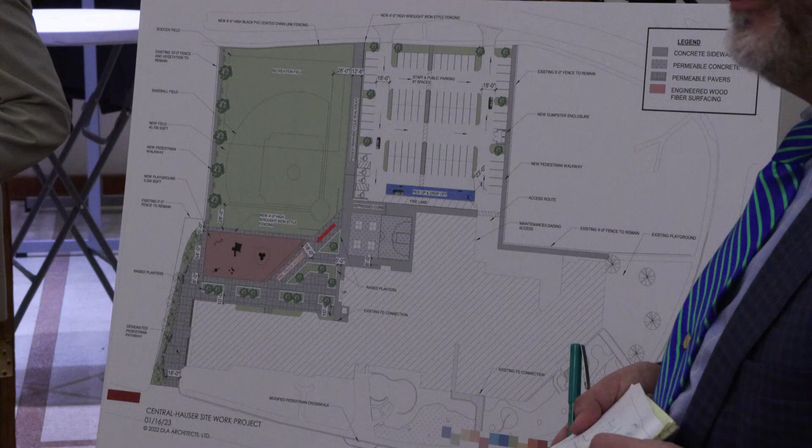I would also be okay if that crosswalk went away. I think we're all in favor of more green space, but I would only have you consider it if it can be productive, something's going to grow, and it can be maintained properly. Because if not, then there's no point in doing that.

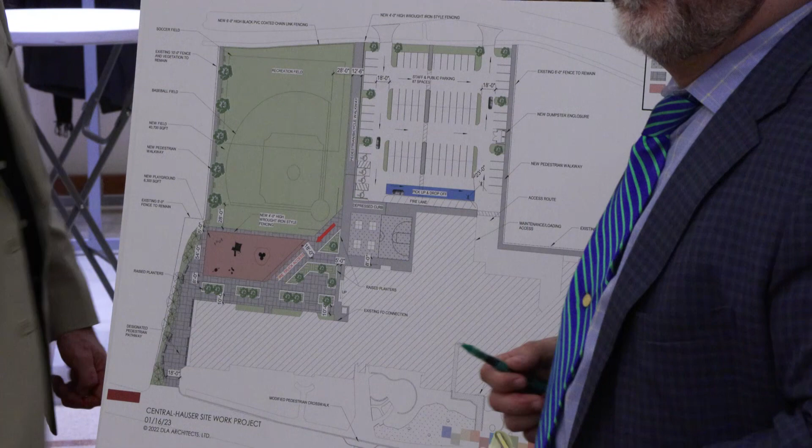I did have one question. The buffer area that faces off the parking lot that faces Akenside—I believe that's supposed to be 10 feet wide—is it intended to be? Yeah, I think that's what the code requires. Is it 10 feet wide? Yes, it is. Okay. I just wanted to check, it didn't look that wide.

Oh, and one other question. I know right now, recently what they've started doing is with the driveways, they rope them off so that cars cannot enter. I assume with the new plan that would not be necessary anymore. That's correct, it's not the intent to continue that.

Anything else? Mr. Sachi, please. Need to record you for posterity.

So I appreciate your concern for expanding green space, but I would fully endorse what Commissioner Matthews said about pushing more cars out to Woodside. Right now, every year it gets worse as D96 adds more staff and they don't have any place to park in the lot. It's got to be about 10 or 12 homes as you proceed north on Woodside that have D96 cars parked in front of them all day long. So if we have a visitor, they literally have nowhere to park. I would appreciate any moves towards keeping as many parking spaces as possible on D96 property and not pushing them out onto a main street like Woodside. Or Aiken—I don't think anyone is here from Akenside tonight, or if you had any feedback from them—but my guess is that they'd feel the same way.